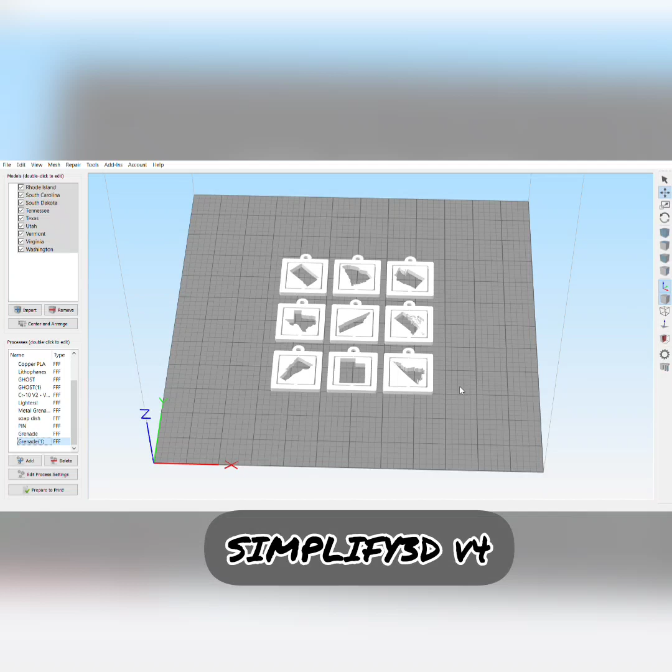So what's up everybody, we're just going over how to do some item by item or sequential printing on Simplify3D. Getting straight into it, I've already loaded up and imported my models. I'm gonna go through, move them first to where I want them to be, and then I'm gonna select them out for printing. Let's go through it.

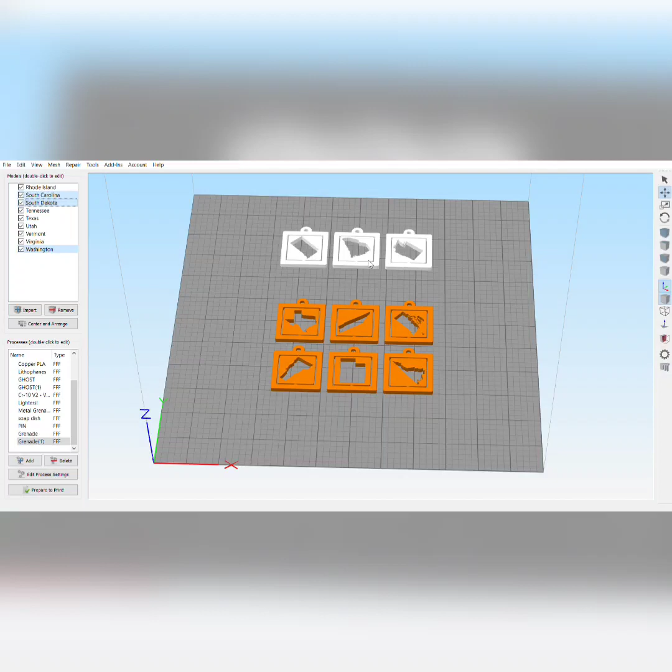Alright, so first I need to space them out. I measured the extruder already, and I know I need about 30 millimeters on each side so that one part won't hit another once it's fully printed. This can vary based on the type of extruder you have, the shape of it, or how much it has around it. So just measure that up, and if you need to adjust that, just adjust it on a per need basis. So I'm going to adjust these down, so I have enough space all the way around, so one's not going to hit another.

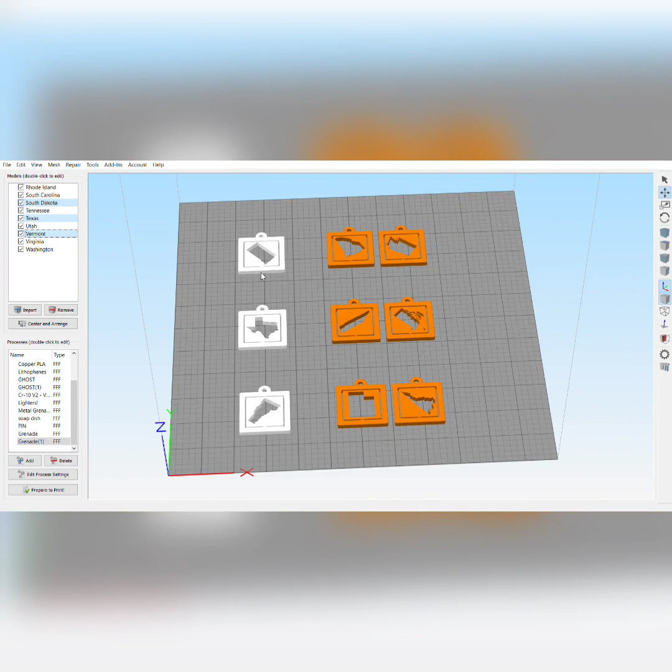In this case, I have keychains. You can do this with any item, it doesn't really matter. If you want to print one item at a time instead of layer by layer, this is the best way to do it. Alright, so kind of centered, obviously not perfect, but they'll work.

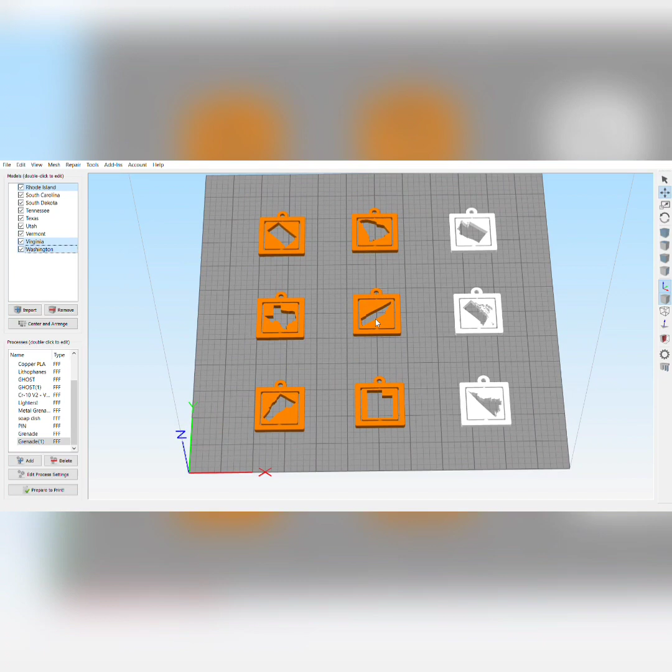Okay, so next thing I want to do is select the program or the profile process that I want to use for printing. So I'm going to select that program, double click on it. And you can see if I go down here to select models that all of them are highlighted. I'm going to go ahead and select none and start with the very first one on my list here, which is Rhode Island. Click OK, click OK again. Now you see when I click on it, if I click on a different process, all of them are highlighted for printing, but if I click on just one, it's only going to print the one.

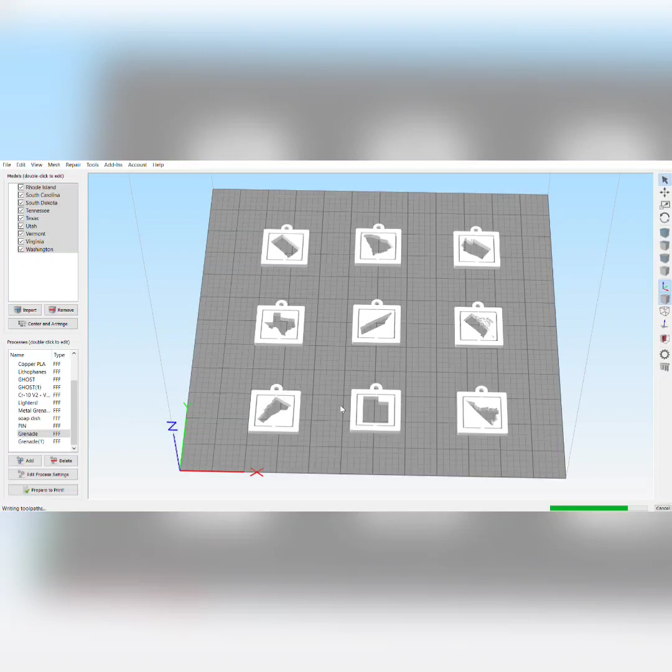So I can show you here if I just go to this one. Let me prepare to print it real quickly. You can see it's going to do all of them. Not only is it going to do all of them, but there's only 23 layers, so it's going to do one layer on each of them and then move on to the next set, and the next set, and the next set. So you're going to end up like this - it's going to print all of them, and you're going to end up with them all done at the same time.

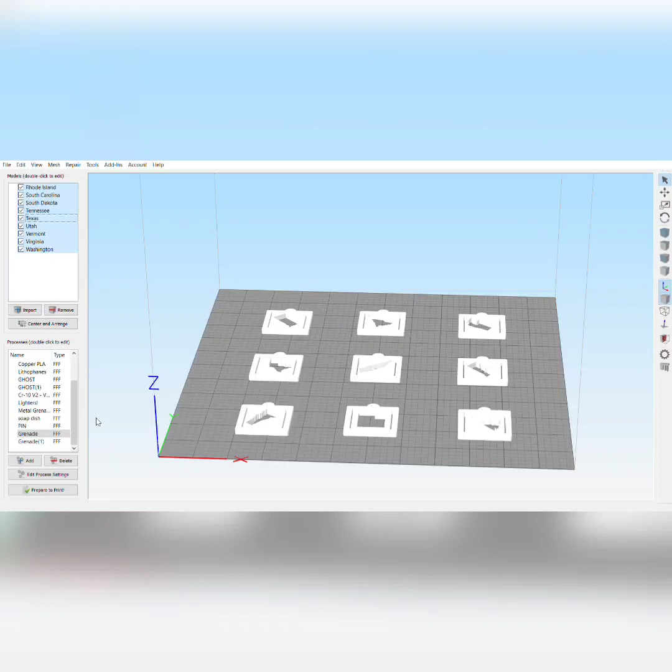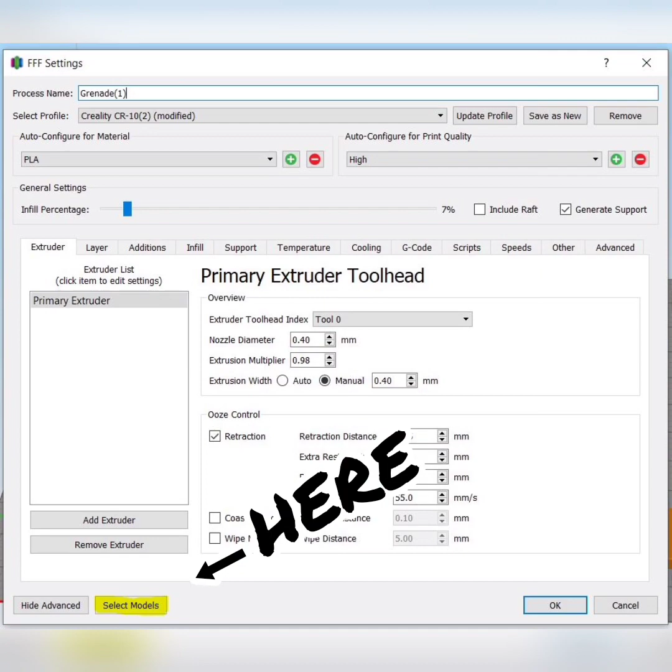We want to print one at a time. So what we're going to do is go back. Now, this one's already printed, so we're going to control-copy on that, control-paste, and make as many as we need. There's 9 prints here, so we're going to make 8 copies of it. And we're going to go under each one and select the next model. Alright, so now each one has its own model.

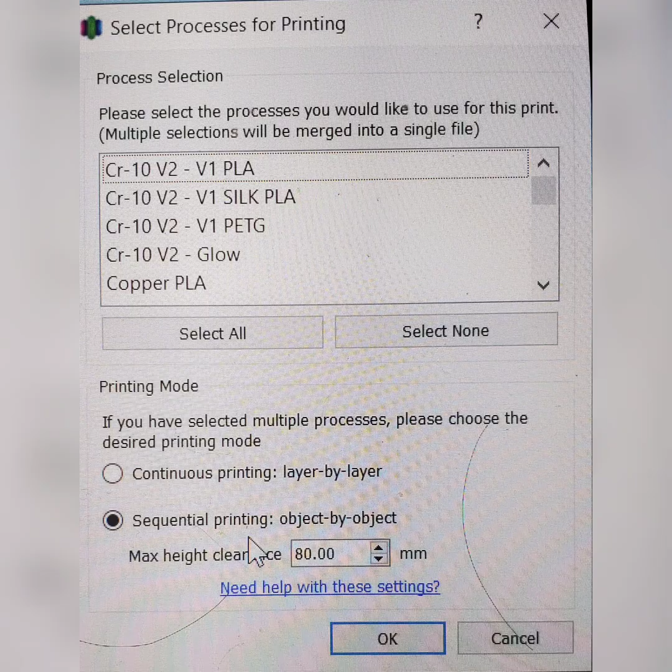Okay, and just remember to select all of your printing processes. When you go to prepare to print, click on sequential printing, object by object instead of layer by layer. You also need to make sure that this is taller than your model - if it's shorter than your model, it'll print in stages, printing each one a little bit and then going back over to do a little bit more. So we made this really tall. And if the object is taller than your extruder nozzle, then it will matter what order you print this in. You'll want to print it from front to back or back to front - you won't want it to go crossing, or else your gantry will hit across and hit one of your models standing up.

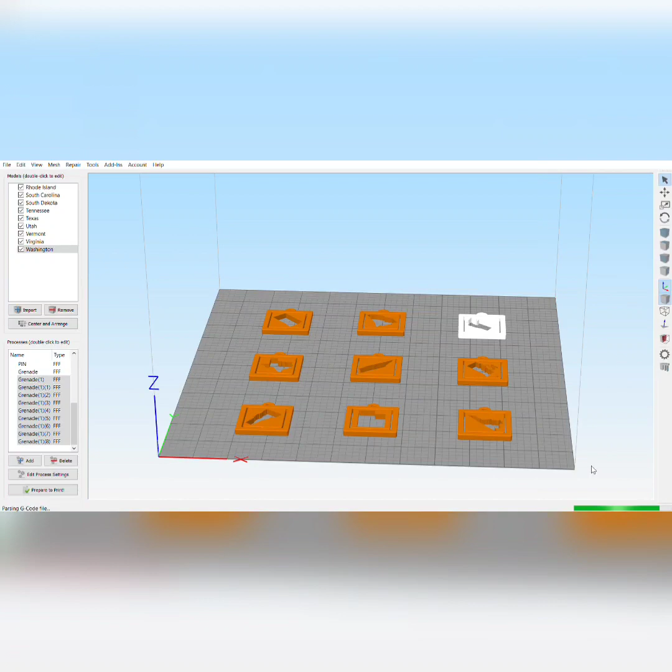So all of them are selected. Print. Now you can see we have 207 layers. It's just going to go through and do one model at a time.

I'll get much better print quality results this way for individual models, especially small ones like this. And I have a lot less chance of busting one off in the middle of a print and causing the whole thing to fail. If it fails, it's really only going to fail one. By the time it moves on to the next one, it should either repair itself, or by that time, hopefully you catch it.

And then it's just back to save your print, save your file, and we'll call it good.

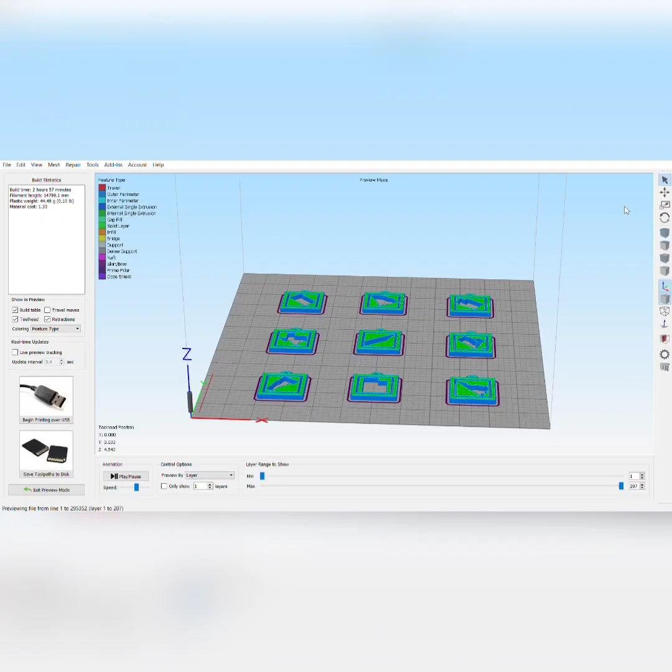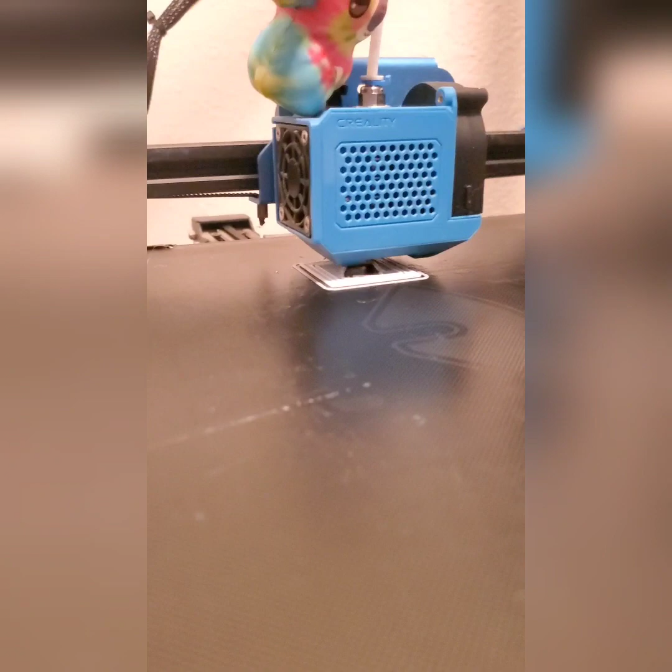As you can see, it's already a couple layers into the first print. And it'll do that one and move on to the next one, and on to the next one, and on to the next one.